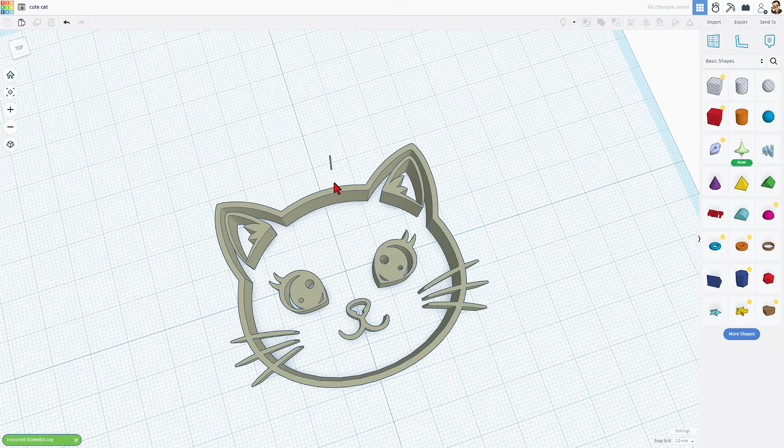Now notice it does have an artifact. There are a lot of ways that we could just cut this off in Tinkercad, but I'm going to actually go back and fix it in picsvg.

Check this out, we can click right here and clean the SVG. This is the tiny dot it is spotting. So if I just hit the eraser, I want to erase that little piece. I'm going to keep zooming in until I can find that silly little dot and erase it. Now as I slide the slider back, I don't see any other glitches, so I'm going to simply download this SVG as well.

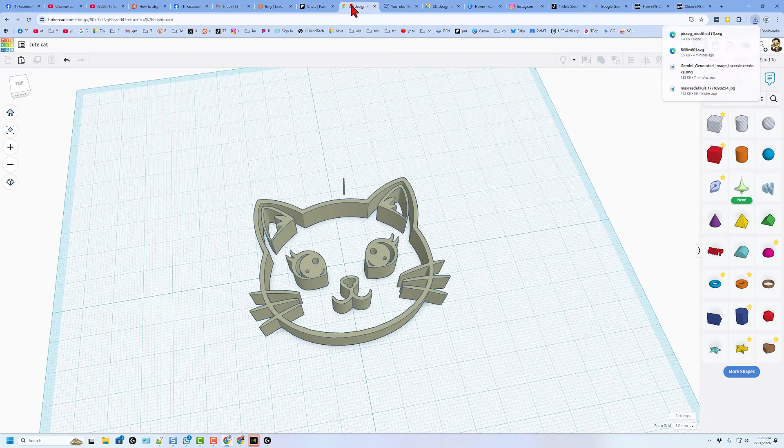I've got the modified name, and let's bounce to Tinkercad again and import that one more time. Delete, import, choose a file. There's my modified art. Still want the 60 or 65, I said, and press enter. And this time when we import it, we have got a better SVG to work with.

All right, so real quickly, I've got a lot of tutorials where we switch and go to outline and build the outside of this shape like that. It is handy for a lot of projects, but for this one, the whiskers would be goofy and it's just not that awesome. So I'm going to go back to the default and then I'm going to show you how I would simply trace this with Sketch.

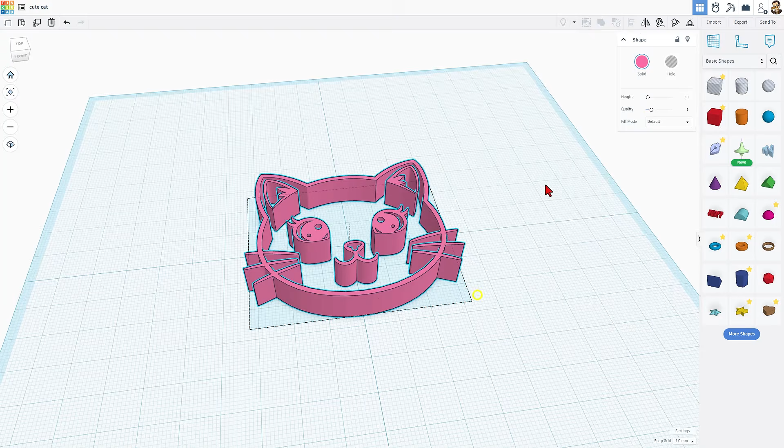Two quick things to mention: Tinkercad added these lines to line things up the other day. Check out how cool this is. I know this shape is centered, so I'm going to hide it.

I'm going to work with Sketch, and since these lines are here, it's even easier to drop it in the 20 by 20 grid and line that all up. Now, if I finish Sketch and do Show All, the next time I edit this, we can easily trace it.

If you've never used Sketch before, I want to remind you the Sketch Features button is right here. It has tons of great information that'll make you smarter and more efficient as a designer. You can check this out at any time and simply cancel this when you're done learning. It'll always be here if you want to check it out again.

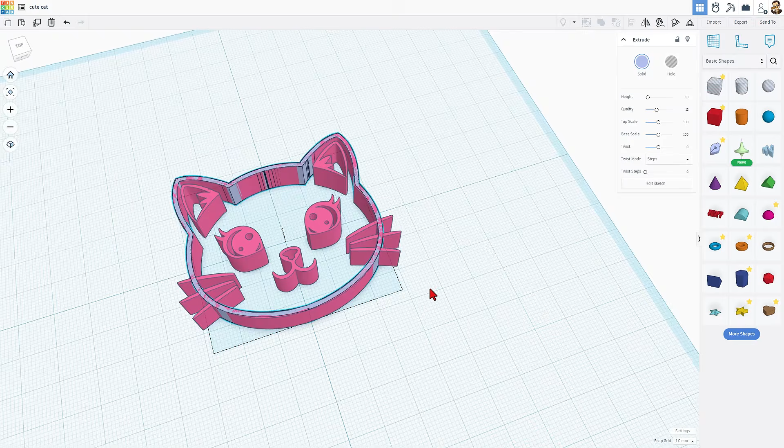If we hit finish sketch, we have now got the little cat face that we can work with. I'm going to set the pink one to 2 millimeters, and this one to 3 millimeters just so that we can still see that outline, and press enter.

I'm also going to make it a fun color. I'm going to choose to make my cat a black cat, and I'm going to go with the blackest we can using the custom colors.

So now we're going to make the back plate for this. Click on the outline we created and do Control D. Edit the sketch, click on one of the sides, and simply hit close path. Check it out.

It drew that line for us. I'm going to switch to the other side, and I'm going to close that path as well. Now when we hit finish sketch, I can take that and set it to size 2 and press enter. And our design is starting to take shape.

I'm going to click on the pink part, and I'm going to do Control up, and raise it up 1 millimeter so you can see how all the features show up. Now you've got a couple options here. If you wanted to just use these features, check this out.

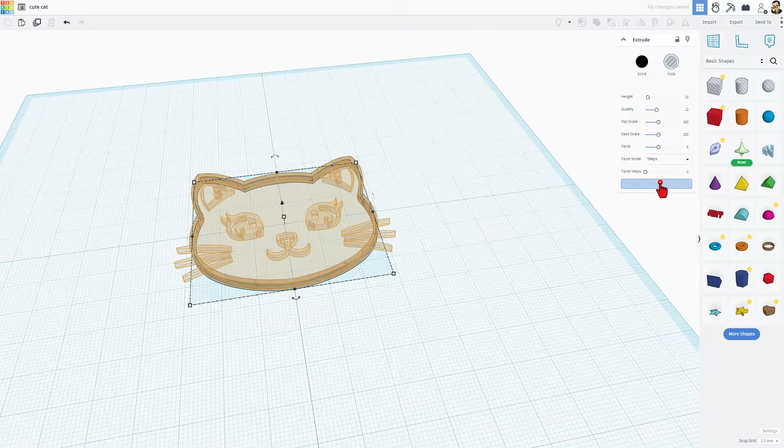I'm going to click on our black outline. I'm going to do Control D, make it a hole, and edit that sketch. So now when I click on these outline pieces, I can change their stroke width. I'm going to change this to 4, so it is quite a bit larger on both sides. I'm going to do the same thing on the other side, stroke width 4. And I'm really quickly going to back out and show you why this is cool.

Right now, if I click the pink and shift click that fancy new hole, I can do Control G, and we've cut off that outline for our cute little keychain or whatever you're trying to build.

Now you may notice the whiskers are still a problem. We're going to make the whiskers a different way. Let me show you how we fix this. I'm just going to double click to edit that shape. I'm going to click on my hole, and we're going to edit it.

To get rid of the whiskers completely, I'm just going to hit P for pen, and I want to draw a shape that's going to cut those out. Super simple. If you make a bad move like I just did right there, just grab it when you're done and it's finished.

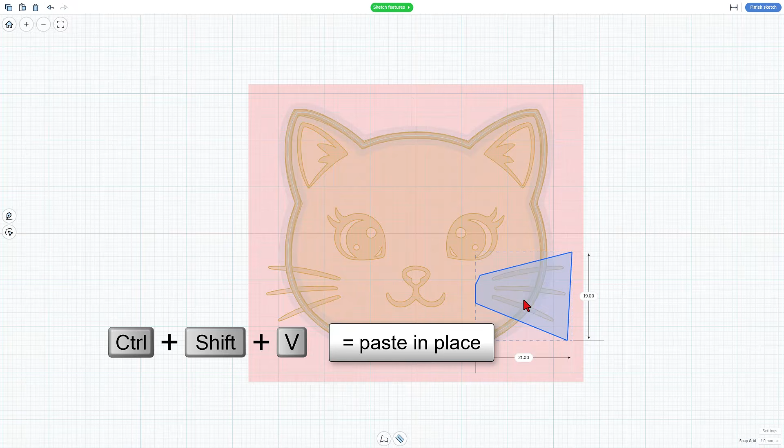I want to do the same thing on the other side, so I'm just going to do Control C and Control Shift V. Got my nudge set to 1, so I can just nudge this to the other side and use that very same flip trick. And press enter.

Now, when I click Finish Sketch, notice the pink edit. When I click outside the edit, we have got a cat that's got cute little eyes and stuff and is going to print quick. I'm going to set these heights to both 2.

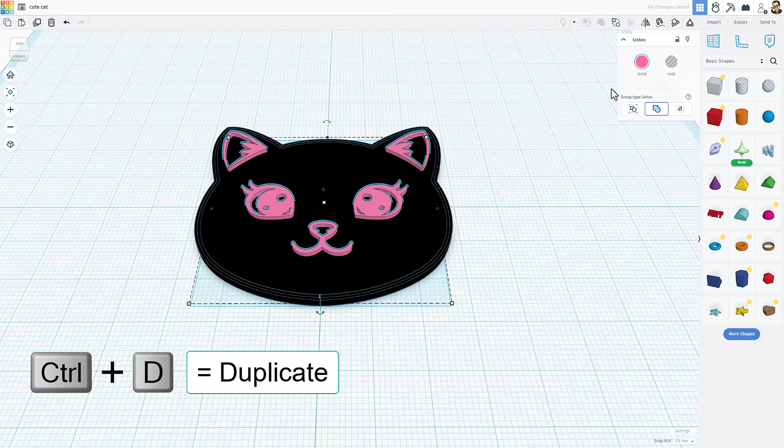All right, so here's how we're going to get our whiskers. I'm going to go back to this pink one and do Control D to duplicate. I am going to ungroup it, and we're going to use this cutting tool again.

Simply double click to edit it. We can get rid of the whisker cutters, and we're just going to delete all these, and we're going to trace where these whiskers are. These steps are the same as when we trace the face.

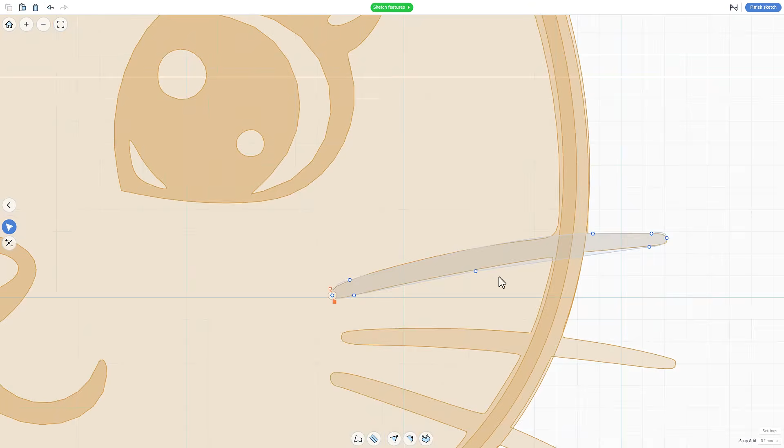Once again, I'm using the Bezier curve to go around the ends, and then just making it as close as I can to the original whisker shape. The more you practice, the better you get, and even if it looks a little bit different, quite often, it makes your design look even a little bit more custom.

Double click to finish. I'm going to grab all 3 of those and get my dimensions on. That dimension's one that matters. Now we can do Control C and Control Shift V. Get my nudge back to 1. Move it to the other side and make this number negative to flip it. Bang.

Finish sketch. Now that we've got our whiskers made, we can delete this part. All right, I'm going to take this and drop it all the way to the bottom. Let's do D to drop. And then we want to make it 3 high so it matches the rest of the parts. And instead of a hole, we're going to make it pink.

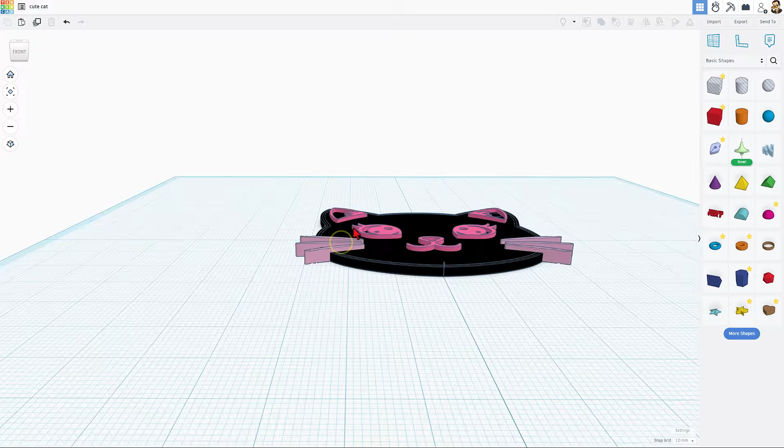So let's review super quick. Amy was hoping to make designs with layers so that they could print in multiple colors nice and quick. This is going to work that way because we're going to send it to Bambu Studio and use the print by layer height technique. If we check this, 2 millimeters high is all going to be the black. The other are all going to be the pink. If you wanted to have more layers, you would just take a separate item, like say you wanted to make the eyes a different color, and you'd make them 1.5.

You would just separate these parts to build as many layers as you want. I'm going to stick with this so it's a quick print. I am going to really quickly turn this into a keychain by putting a hole back here.

I'm going to simply bring out a cylinder. I'm going to shift stretch it, and the number I like to use is 5 millimeters. Now I can just grab this part, put it somewhere inside there, nudge it with my arrow keys till I'm happy. I'm going to set my nudge to 0.25.

Let's do top view and fit view so we can zoom in a little better. Now I can do shift select and Control G to group. Bang, it is cut out.

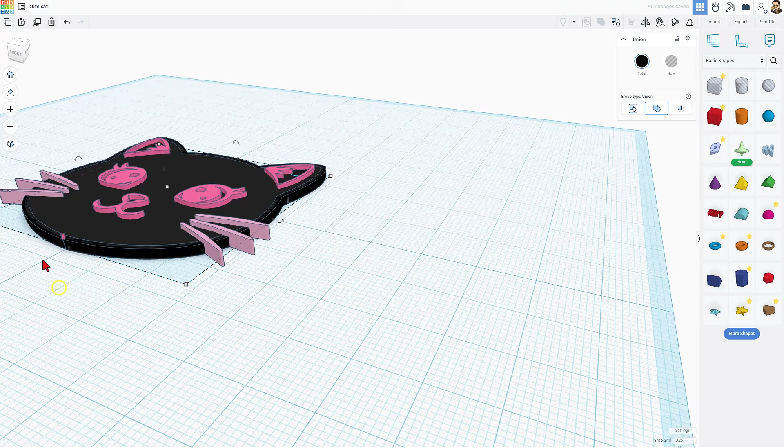Now from this angle, I do see that we've got a little part here that's not the way we want. Let's quickly double click that and go into that hole, and we're going to just edit it. All we need to do is click on either one of these sides and see this tiny gap. I'm going to set my nudge to off so it's as small as can be.

I'm going to hit number 4 and add an extra point because I don't want this to stretch. Then you got to hit V to go back to build mode. Now I'm going to make that crossover just like that. When we hit finish sketch and click outside to finish the edit, that is trimmed and now we're ready for 3D printing.

Let me show you how this works. We're going to grab the entire keychain, choose export, STL. I'm going to call it cute cat, and I'm going to put Amy after it because that's who asked for it.

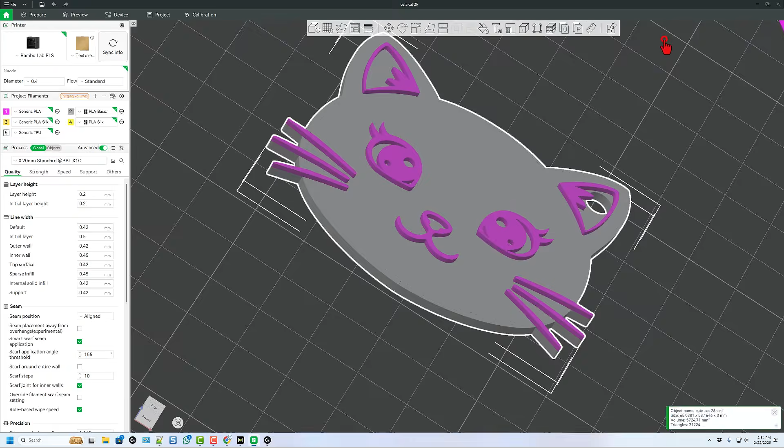Let's save the changes and bounce to Bambu Studio. Simply hit create new project. We are going to add the cute cat for Amy, and then let's do some awesome painting.

When we hit the paint bucket, I want to switch to paint by height range. I'm going to look at this from underneath. Notice I know it's 2 millimeters thick, so I already set this, so I'm going to just click right here, and when we spin back, we have got an awesome painted cat.

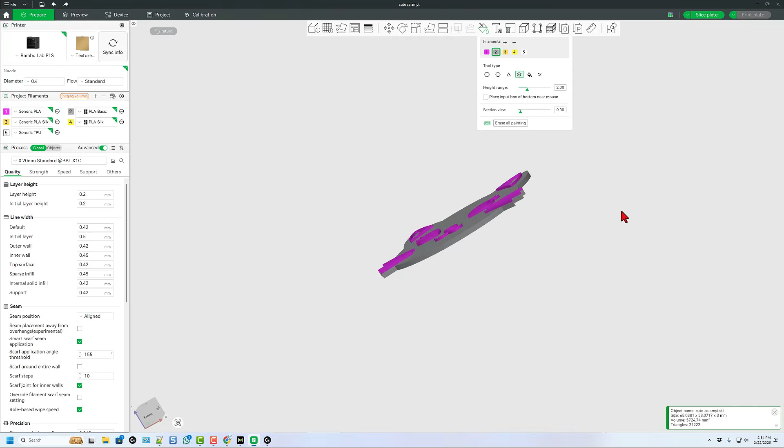Notice the whiskers are going to start gray, but end pink, and it's just going to look wicked cool. And it's going to print relatively fast.

Let's check how long it's going to take. We're going to use 0.2 standard settings, slice the plate, and bang, under 21 minutes. How cool is that? Finally, print plate, and let's send it to the 3D printer.

And a little more than 20 minutes later, we have got an adorable cat keychain.

How cool is that? As I wrap up, I want to say thanks to Amy for the question. Love this sort of project. I also want to emphasize you can use this for flexi keychains, normal keychains, fidgets, light boxes. Once you know how to make those outlines and then find ways to use your details, you can make fancy projects in very little time. It just takes a bit of effort to gain the skills.

Of course, we also learned how we can edit in picsvg, which is really awesome. You can now make all sorts of projects with totally free tools.